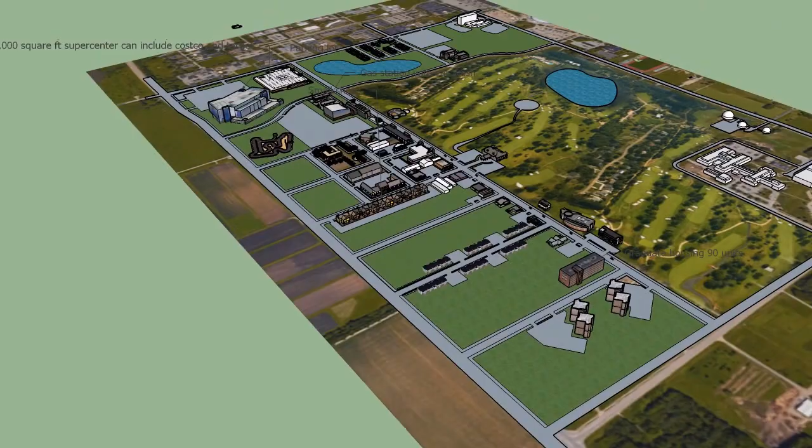Ankit Singh and I head the project management department. We believe that our actions affect the project economics, schedule, safety, and environment, and thus we use prefabrication wherever possible. Prefabrication is greener, faster, smarter, and safer.

We have several repeating units in almost all buildings in this project, and thus prefabrication will be very advantageous. We will be using an on-site fabrication yard, which will not only help save transportation costs, but also, since we will not be subcontracting it, lead to more savings.

Now I'll briefly explain the strategy for prefabrication. We'll be prefabricating the doors and windows because they are the major repeating units, and it will be done as per drawings and specifications in our prefabrication yard.

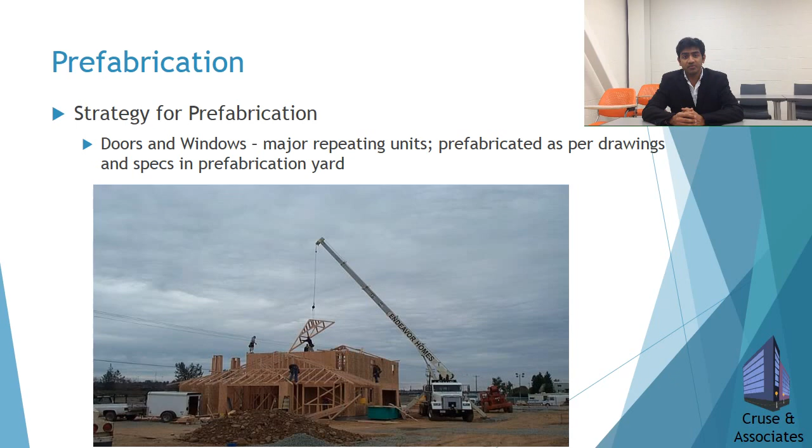We'll be using room kits in the kitchens and bedrooms because they contain a lot of repeating units. These units will be fabricated in the prefabrication yard and transported to the site in small, manageable pieces or as complete units, whichever is feasible.

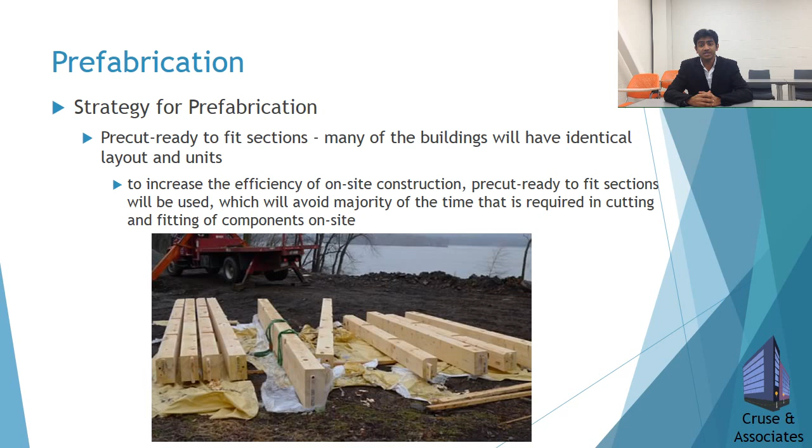Many of the buildings will have identical layouts and units, and thus we'll be using pre-cut, ready-to-fit sections to increase the efficiency of on-site construction. Using this prefabrication strategy will lead to a reduction in construction waste and savings in cost and time, helping us earn LEED points and achieve a LEED certified rating for our project.

Sustainability is always at the core of design and construction principles at Cruse and Associates. Low cost, high impact solutions will be incorporated into the project, giving us sustainability without compromising project economics. Now I'll describe some of the green and sustainable initiatives we'll be incorporating in this project.

First is sustainable transportation and bike lanes. MTD bus stops and bike lanes will be incorporated throughout the area to promote green transportation.

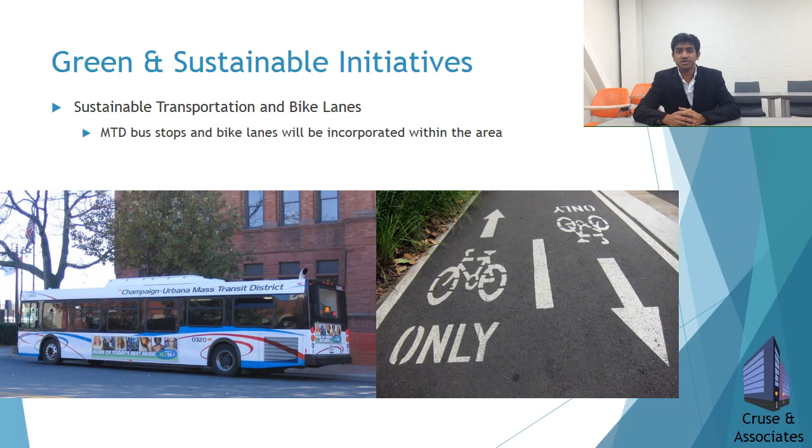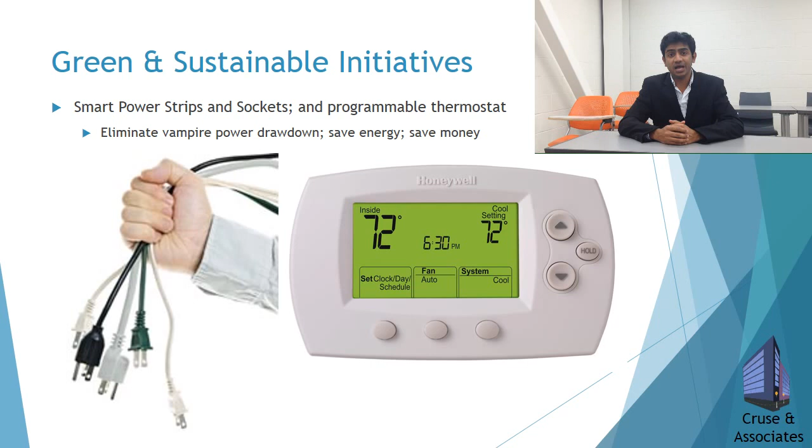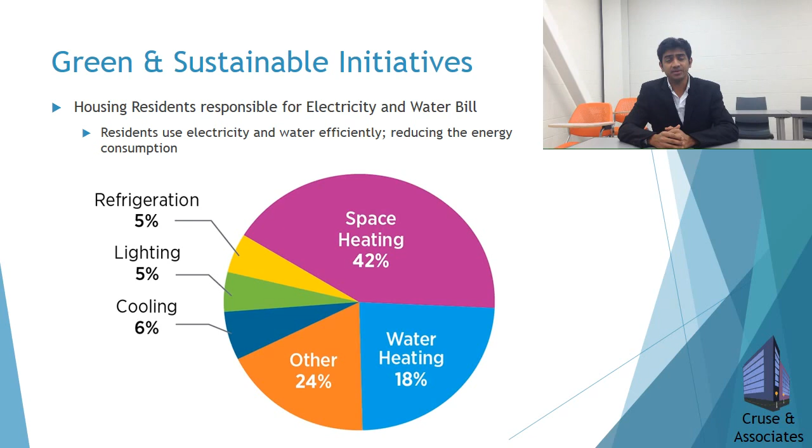Installing low flow plumbing fixtures will help conserve water and save energy. Smart power strips, sockets, and programmable thermostats will eliminate vampire power drawdown, saving energy and money. From our experience in previous projects, we understand that holding housing residents responsible for their electricity and water bills leads to more efficient utilization and reduced energy consumption.

Employing such sustainable practices will earn us a minimum of 26 points in the LEED point system and make this project LEED certified. Our project will be completed in three phases.

In the first phase, we will concentrate on undergraduate housing and the development of shops and restaurants around it. This will provide students the opportunity to eat and shop near where they live, and give businesses a ready market.

The second phase will concentrate on graduate housing and the remaining commercial strip. This will aid in renting both commercial outlets and graduate and undergraduate housing quickly.

The third phase will concentrate on the alumni center, extended stay accommodations, daycare, and golf course. The golf course will be leased for 20 years to Isleworth Golf and Country Club. It will be designed, built, and operated by them, with a revenue of $2 million per year paid to us.

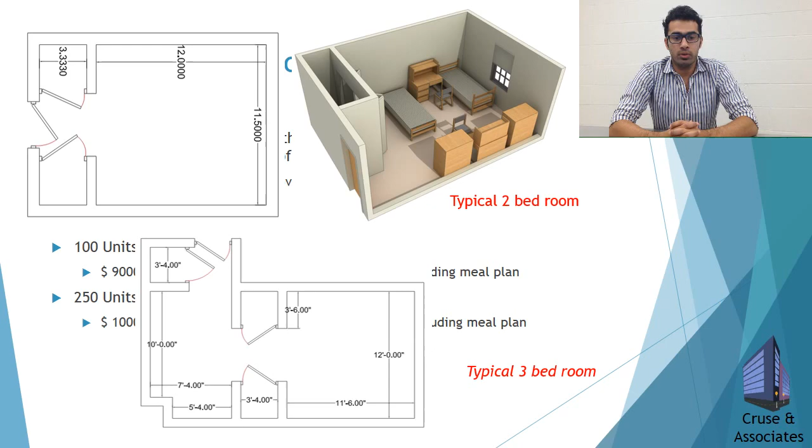Now you can see a typical plan of a 2-bedroom. On the right you can find a 3D model of the double bedroom. Down you can see a 3-bedroom dorm. This is a model which we modeled.

Now about graduate housing. We have divided our graduate housing into 2 parts: apartments and dormitories. In apartments we have 150 apartments, in which 75 are 1 BHK and 75 are 2 BHK. The sizes have been chosen so that they are not too expensive, nor too uncomfortable. We have 90 units of 1-bedroom dormitories.

And now this is how the building will actually look after it's built. So now we've discussed the undergraduate and graduate housing.

Now here are some amenities which we'll provide. In all dormitories, we have furnished rooms, a common hall with television and some recreation area, 24-hour open computer labs, a gym and fitness center, a small movie theater, and high-speed internet.

Now for the revenue, we have considered an occupancy factor of around 80%. The rent escalation would be around 2% a year, and as a green initiative, the housing residents will be responsible for the electricity and water bills.

The highlight of these extended stay accommodations is its proximity to the golf course and the lake, and we have lush green landscaping, and it's really scenic.

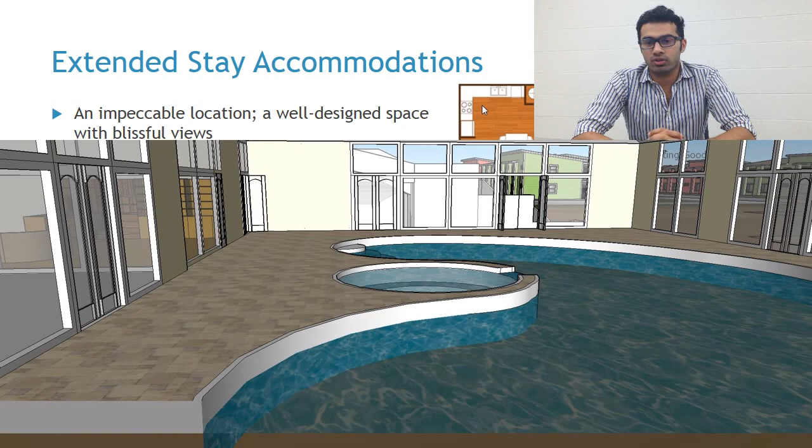So now these are the floor plans. You will find typical floor plans for a 2-bed apartment and a 1-bed apartment, and this is how the model and the building will look after it's been built. On the right you can find a clubhouse. Now this is the view from inside the clubhouse.

Keeping in mind the kind of guests we'll receive, we have provided the following premium amenities. Firstly, we have private balconies with patios, provided specifically to enjoy the beautiful views around the apartments. Then we have plenty of parking space, an indoor pool, a fitness center, and a sports and recreational area.

We have 24-hour on-site management for the convenience of the guests. We have hot tubs and tanning beds, high-speed internet, and all other general facilities as well.

Now I'm going to give a brief description of the Alumni Lifelong Learning Center. It offers a wide variety of accommodations for all kinds of conferences and special events. It is located at the junction of South 4th Street and Hazelwood Drive, with adequate parking space for each guest. It's a 3-floor building with 66,000 square feet, and the view is amazing.

To the east there is the golf course, and to the south there is the lake with a recreation area. There are a lot of conference rooms, classes, a cafeteria, and a lounge bar.

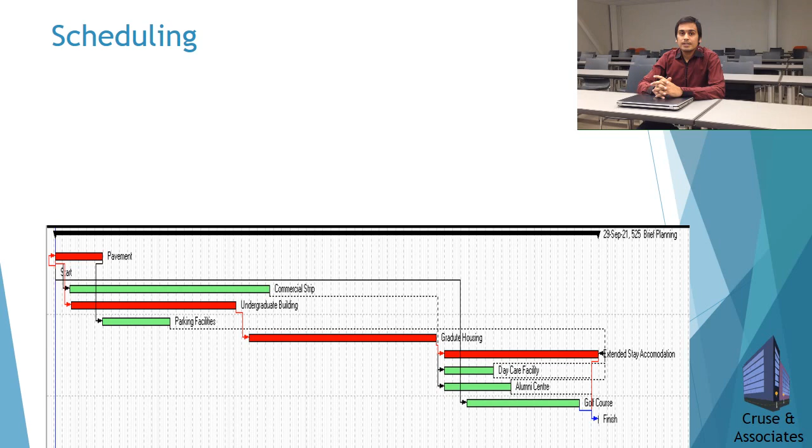I will talk about scheduling of our project. On this bar chart, activities are listed. The activities marked in red will be on the critical path. For instance, the undergraduate building, graduate building, and extended stay accommodation will be on the critical path. Those buildings will be given higher priority. The construction activity will take around 5 years and 6 months.

We had planned to start construction in March 2016 and finish it by September 2021. We have arranged the activities such that no new construction will start in winter. In winter, the crew will work on interior work like MEP and envelope.

The pavement duration is about 6 months. As soon as the pavement finishes, our crew can start construction of parking facilities. The parking facilities will be constructed parallel to the buildings in that area.

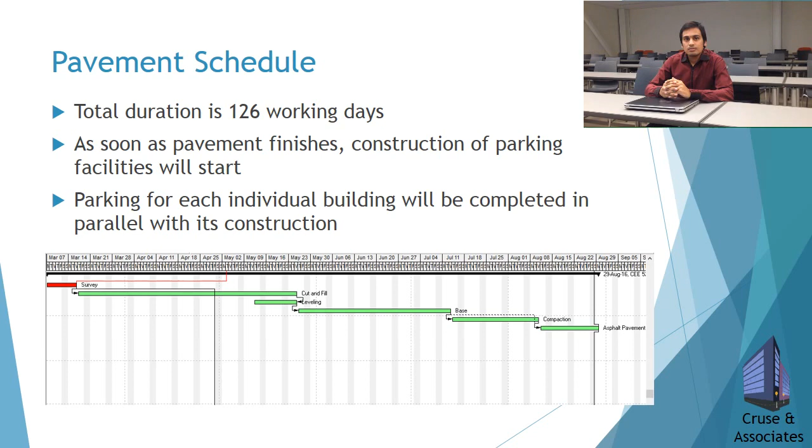The construction of undergraduate housing is planned to start on 5th of May 2016, as it will finish in the first phase of the project. It will take around 20 months to complete. Also, it will start after construction of the approach road, which will take around 35 days.

So the commercial strip will take 2 phases to complete. It will take around 24 months for completion. It is planned to start on 28th of April 2016.

It is scheduled such that the idle time of resources will be minimum. So, for instance, the mobilization and excavation crew, after excavating from site 1, will go to the second site, while the foundation and backfill crew will work on the first site.

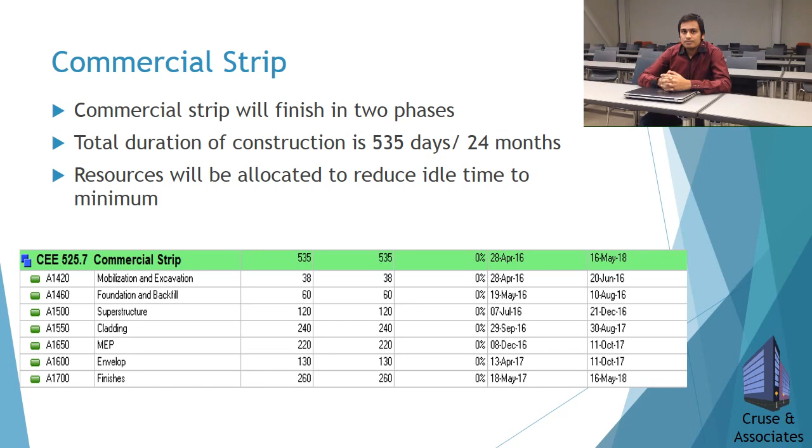There are two parts in graduate housing: individual housing and residence hall. The graduate house will plan to start on 1st of March 2018. It will be constructed in our second phase, and it will take around 502 working days to complete, that is 23 months, so it will complete on 31st of January 2020. After the finishing of graduate housing, our second phase will complete and the third phase will start.

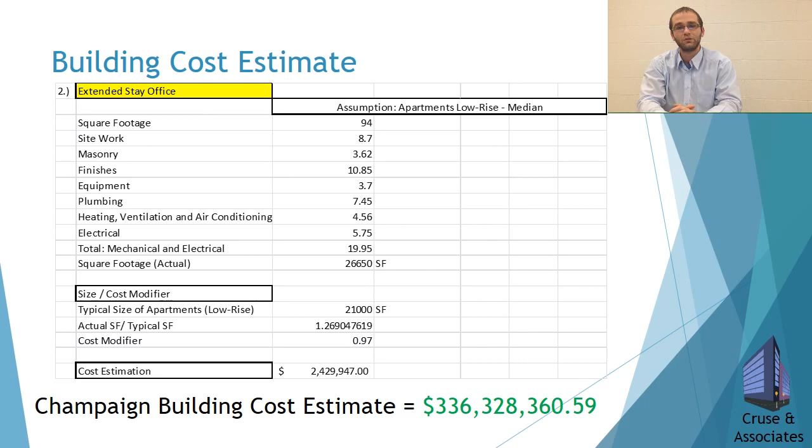Shown here is a basic cost estimation for one of the buildings in our construction area. As you can see, many factors were used, but only 3 were applied to get the cost estimation for this building. Our total building cost estimate was $336,328,360.59. The next part of our estimation was for road estimations.

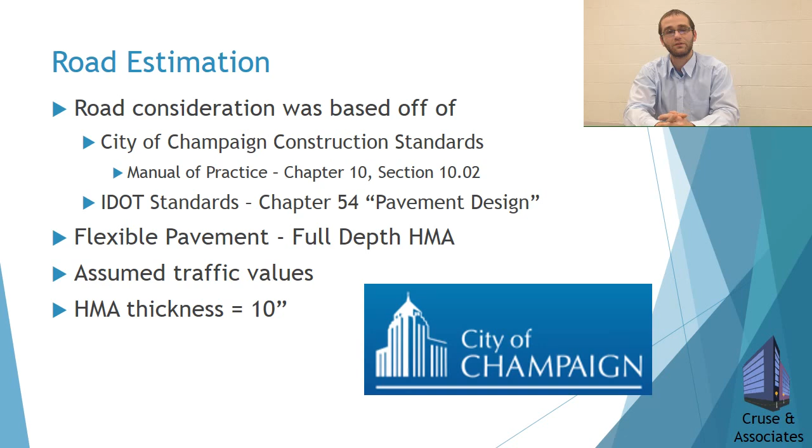The roads were based off of the City of Champaign's construction standards, the Manual of Practice, Chapter 10, Section 10.02, and the IDOT standards of Pavement Design, Chapter 54. We used a flexible pavement of full depth HMA and assumed traffic values, and found the thickness to be around 10 inches.

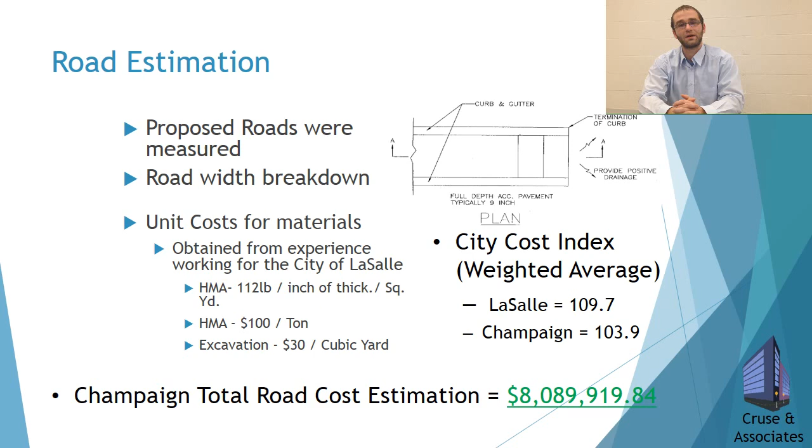Further investigation into the proposed roads showed that our road breakdown included 2 lanes on every road as well as 2 bike lanes for more green travel. The unit costs for materials were obtained through the City of LaSalle, and the city cost index for LaSalle and Champaign were used to get the transfer function. Champaign's total road cost estimation was $8,089,919.

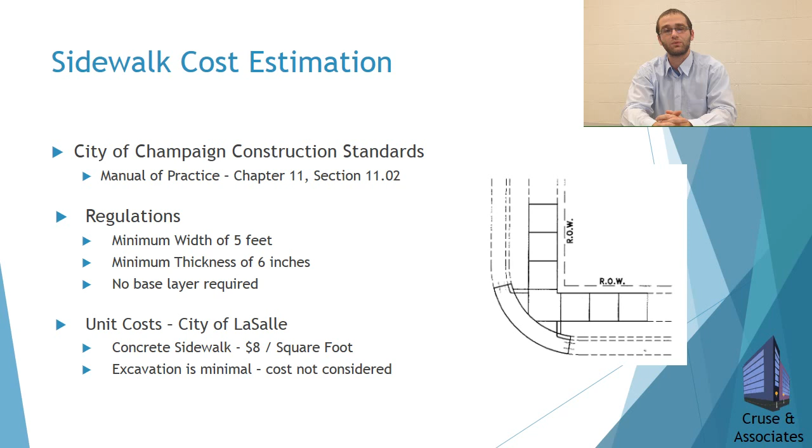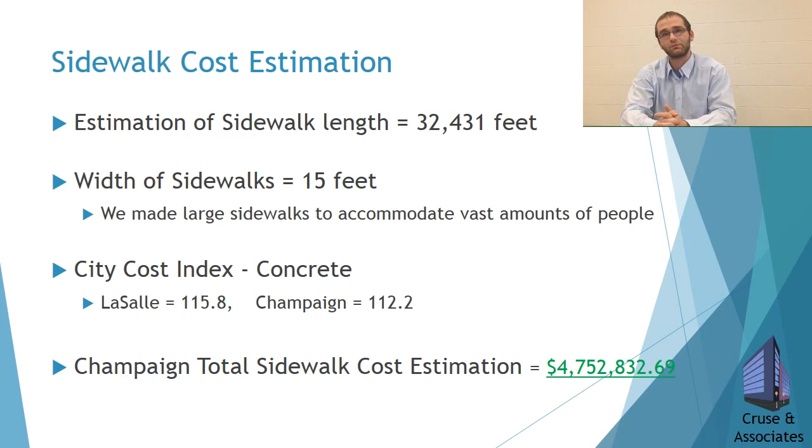The next phase was the sidewalk cost estimation, based off of the Champaign construction standards and the Manual of Practice, Chapter 11, Section 11.02. The regulations were that it had to be 5 feet wide, 6 inches thick, with no base layer. Again, city costs of LaSalle were used. We estimated 32,431 feet of sidewalk were needed, and we used an average width of 15 feet. Using the city cost indexes and the transfer functions, we found that the total cost was $4,752,832 for the sidewalks.